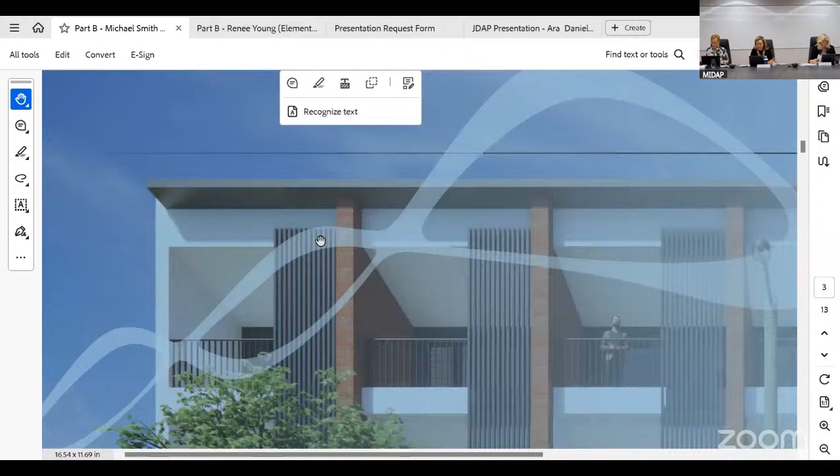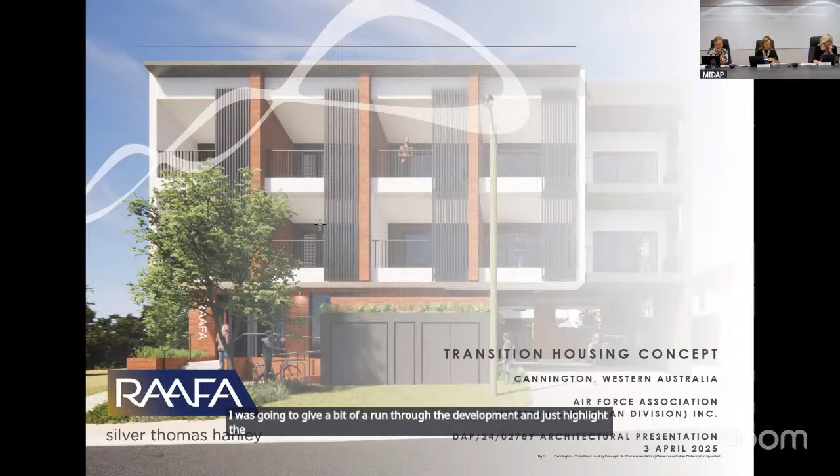Also like to thank the panel and the councillors and the City of Canning officers for the process that we've been through over the last 12 months. I was going to give a bit of a run through of the development and just highlight the design features. So I'll skip the first couple of slides. Sheldon's already covered what the nature of the RAAFA program is.

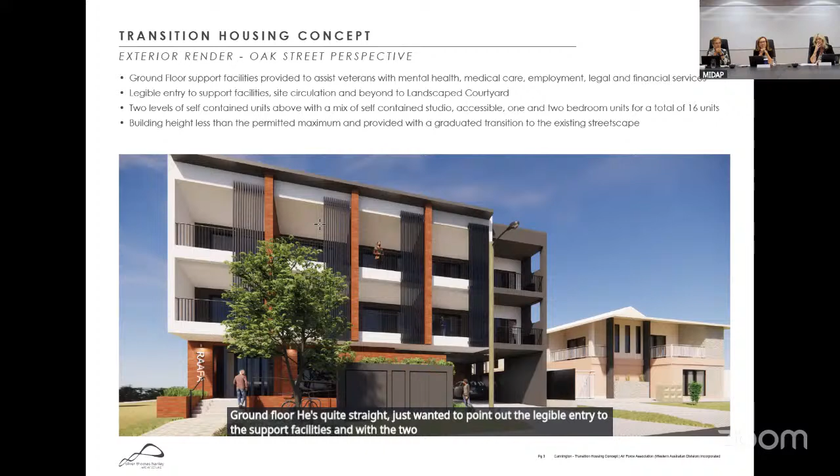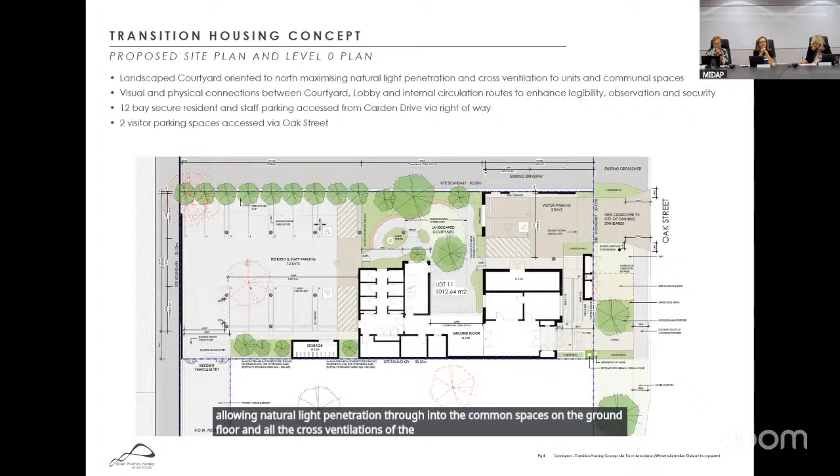So on this slide, ground floor, Oak Street, just wanted to point out the legible entry to the support facilities with the 2 levels of self-contained units above for the mix of dwelling types. On the ground floor, the key feature here is the landscape courtyard, allowing natural light penetration into the common spaces on the ground floor and cross ventilation to the units and circulation spaces on the floor above. So here, yeah, this is a typical upper level plan.

Note again those open walkways, the cross ventilation, the northern light penetration. I'd also note that on this drawing, and Renee will go into further detail on this, but this relates to the condition with the overlooking of the driveway.

I'd note that the current design has extensive full height visual screening. In the areas not covered, you can see more than 50% of each of those north facing balconies already has that screening. So the condition, which Renee will talk more to, refers only to the small sections of balcony either side without the screening, noting that the cone of vision falls entirely on the adjoining property.

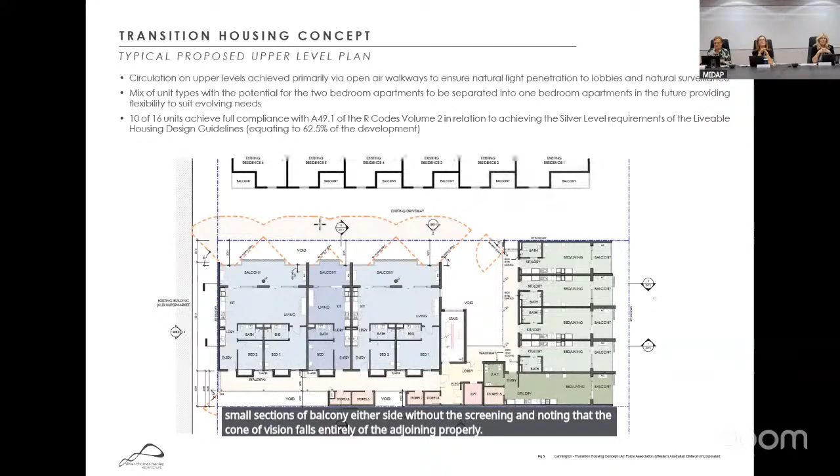And cut off in the corner, but you can see that's the screening, full height vertical screening on the balconies, just screen bottom right corner.

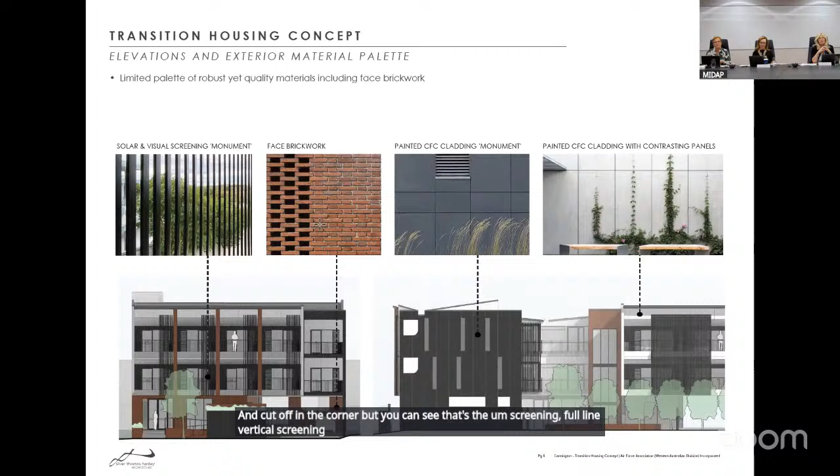I'll just skip these next few slides as you've already read the submission, just to arrive at the end and speak about the local authority engagement with the design review panel.

We had an early engagement meeting with the City of Canning planners in February 2024, and then engaged early with the design review panel with 2 pre-lodgement design reviews and a third one post-lodgement, and then a chair review after an RFI from the City of Canning.

The design team have been receptive to DRP and planner advice throughout, and we've explored many options and made changes across the course of the 4 iterations of feedback from the DRP. I would note that the DRP recommendations at DR4 stage note that the proposal is supported across all 10 design principles.

Thank you again for the time to present.

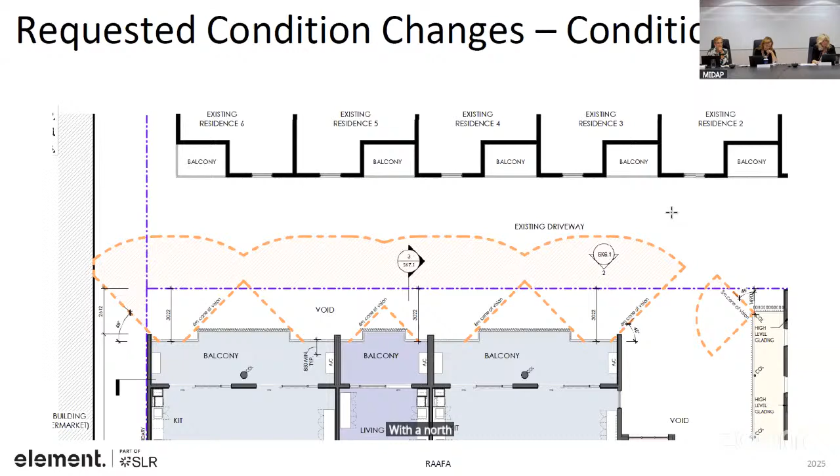They're also secondary balconies for those dwellings, a balcony that's at the upper floor level adjoining bedrooms. The floor plan, included in the City of Canning's agenda item for today, shows that floor plan of the upper level. These apartments on the other side have their living areas at the ground floor with a north-facing courtyard on the northern side of the dwelling.

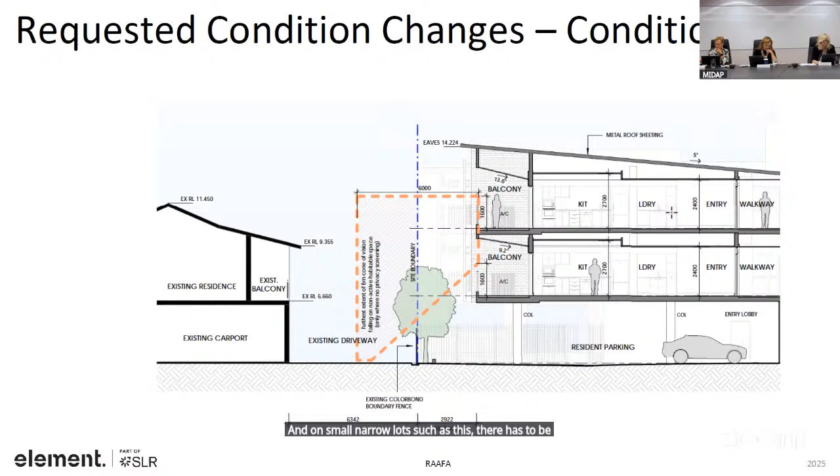So we say the separation, despite the cones of vision going beyond the property boundary, they are on a common driveway and not a sensitive area. We're also in an R-AC0 area, so we are in an area where higher density is anticipated. On small, narrow lots such as this, there has to be some consideration of view sharing. There's a view of the common driveway and those upper floor balconies, which we will be facing.

It's just interesting comparing the separation distance required here. Our code's acceptable outcome is 6 metres from face of balcony, from private habitable space to private habitable space. In lower coded areas, it's 7.5 metres. We would achieve that 7.5 metres if you allow for the common driveway.

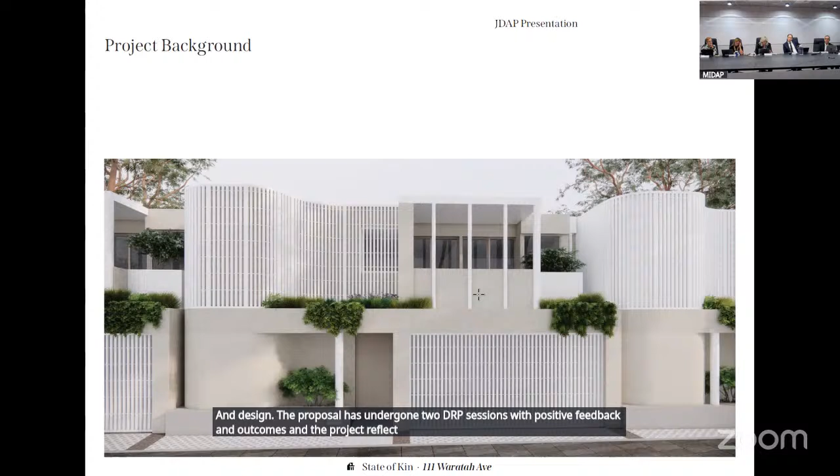The development consists of 5 townhouses, and we have worked really hard to enhance the amenity of both Shrike Lane and Waratah Avenue through strengthening the streetscape connection. The focus through the developer has been on high quality, efficient construction and materials that positively contribute to the local community, as well as providing a place for downsizers and aged in place with a versatile floor plan and design. The proposal has undergone 2 DRP sessions with positive feedback and outcomes, and the project reflects extensive collaboration among all consultants.

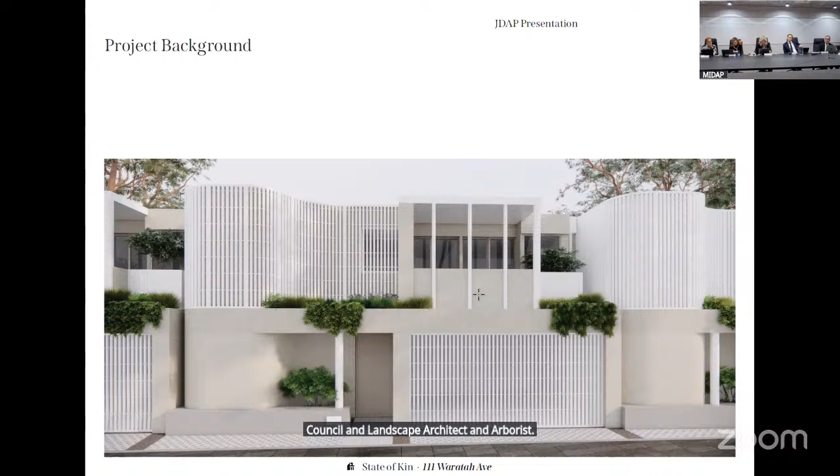Most of the building bulk has been directed towards Shrike Lane, minimising the impact on the neighbouring property. The design preserves the visual character of Waratah Avenue by avoiding the typical driveway access and garage from the front typology. This way we're able to provide extra street trees and greenery where crossovers currently are to Waratah, and the activation of Shrike Lane, including repaving of the road - currently it's just a dust road.

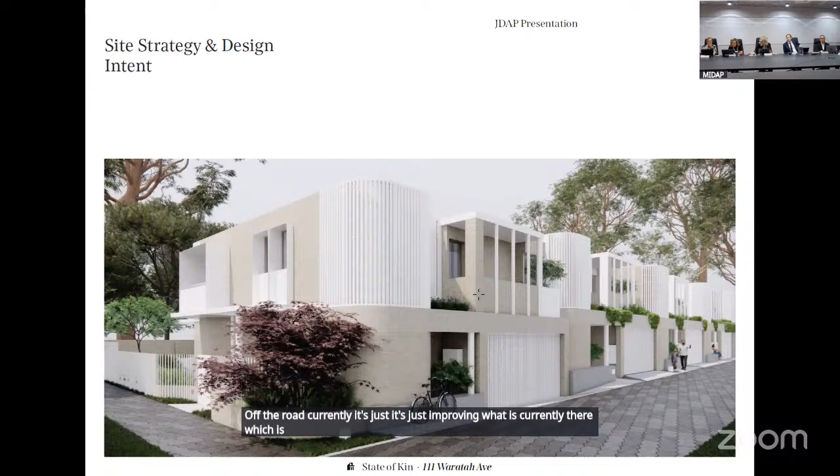This is pretty important because the setbacks to Waratah Avenue actually range from 2 to 5 metres, and there are corner truncations on both sides of Shrike Lane to Waratah and to the rear laneway. The front elevation or setback has been articulated to avoid a uniform facade, improving streetscape appeal. The design curves away from the boundary, creating a clear front entry and enhancing pedestrian experience, and combined setbacks, including the adjacent laneway and neighbouring garages, create a separation of 6 to 9 metres at varying points between the opposite side of Shrike Laneway and our proposal. So there is a lot of varying setback that happens - there's no hard 2 metres, as you can see from the diagram.

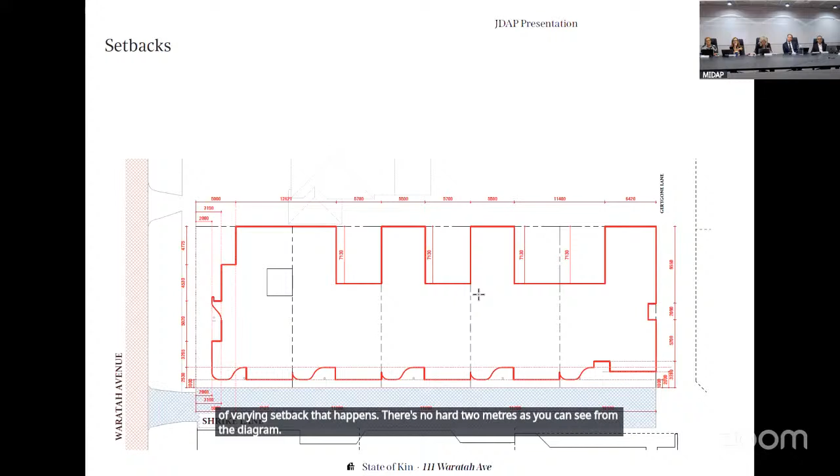The garages and crossovers have been designed to minimise visual prominence to Waratah, integrating varied materials and forms to avoid a repetitive appearance along the laneway. The layout ensures a visually interesting built form, avoiding a continuous wall effect.

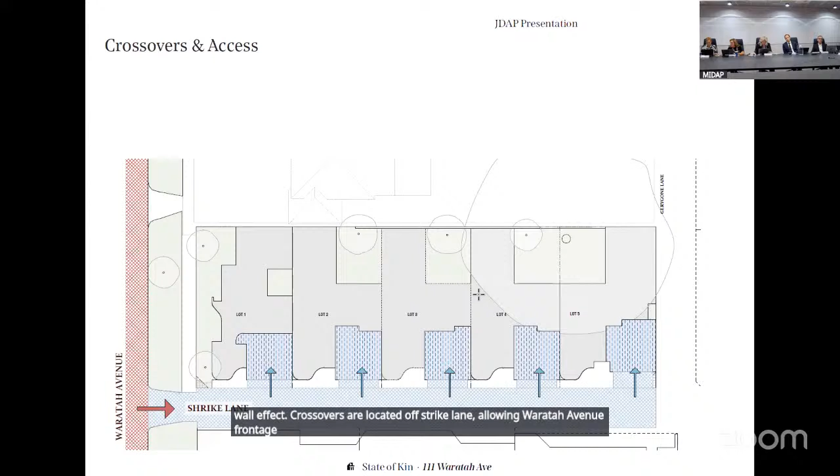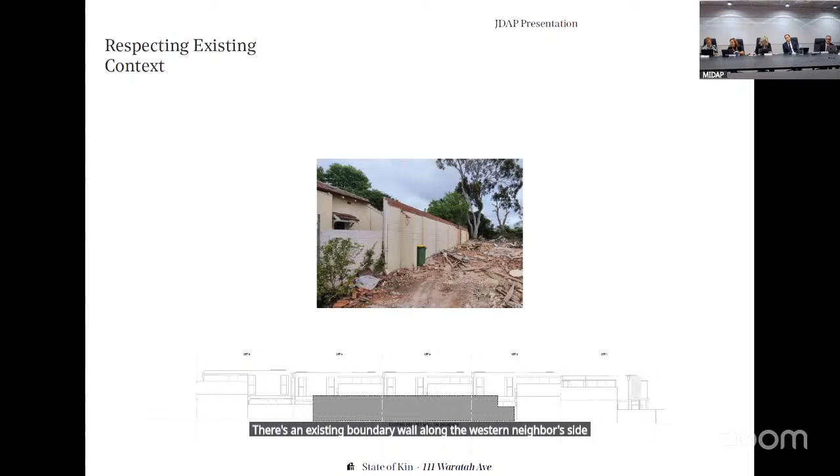Crossovers are located off Shrike Lane, allowing Waratah Avenue frontage to remain uninterrupted and landscaped, which also enhances the green space and supports the addition of street trees. There's an existing boundary wall along the western neighbour's side that has been retained and integrated, reducing disruption and maintaining the boundary as it currently stands.

We have worked with DRP and consultants since July 24 to evolve the development to be in line with the principles of good design as outlined in the SPP 7.0, and you can see every time we have gone, we have achieved more and more.

You're at time, Ira, so I'm going to ask you to bring it to a close. One more, I've done. One more, yeah.

The open space shortfall is a minor deviation per lot. A tree of significance was preserved by shaping the built form around its root zone and canopy.

The design ensures a strong inside-outside connection with high-quality, usable private open spaces, and every dwelling is orientated for optimal access, northern light, private courtyards, and includes an upper level terrace as well. It has been designed for downsizers and flexibility.

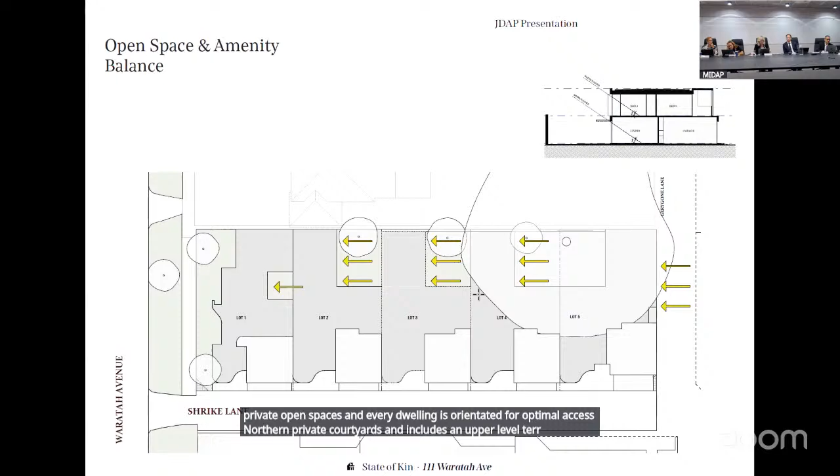I just had one question about the materials. From the 3D images, it looks like it's face brick. Is that right? Yes, a light coloured combination of light coloured face brick, which has either been soldier coursed or stack bonded. So there is a pattern change that happens over different sides of the building to just create a bit of visual interest as well as texture and tactile interest.